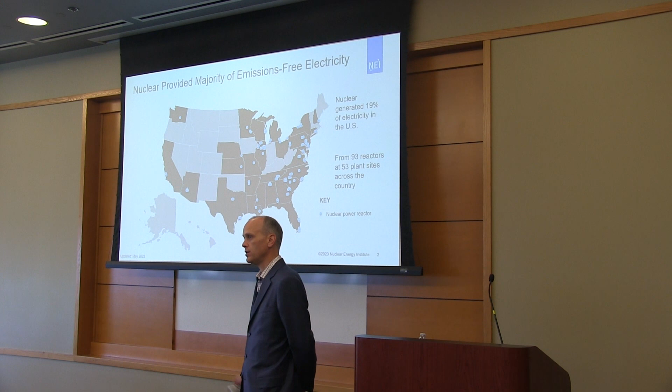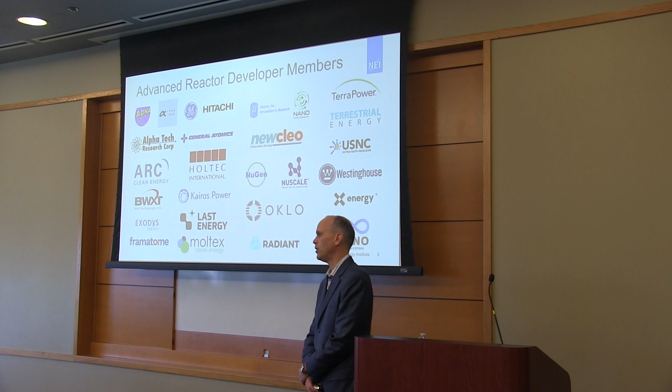The thing that's common with all of these companies is that they see nuclear energy as vital to a clean and sustainable world. A lot of them look at nuclear energy as vital to clean electricity and other energy production, but many also recognize that energy is a foundation of a sustainable living environment, and that there are many parts of the world that don't have access to clean, stable electricity. So some of them are developing designs specifically intended to be brought to other parts of the world.

When we look at the different technologies, there's a couple of ways to look at them, because all of those different companies have different designs. There are some similarities and some differences between all of them. So there are two main ways to group the technologies: one is by size, the other is by the material that's used to cool the reactor.

First, in looking at size, I mentioned today's reactors are 1,000 megawatts in size. We have two types of sizes for advanced reactors. We have small modular reactors—these are 300 megawatts for the reactor size or smaller, and they're modular because you can put multiple together to make bigger units. One example is NuScale, shown here—its reactor is 77 megawatts, and it can come in packs of 4, 6, 8, 10, or 12, so you can customize the amount of power you need for that particular plant. The other size we look at is called microreactors.

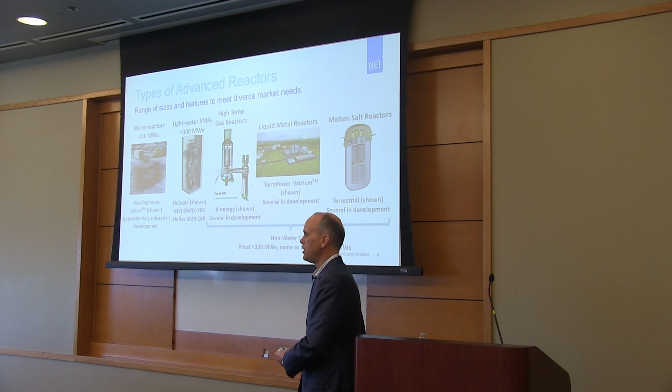The other way to group the different types of technologies is by the material that cools the reactor. So today, the reactors in operation in the United States are all cooled by water. We have water-cooled advanced reactors, NuScale is an example there. And then the others shown here, X-Energy, TerraPower, and Terrestrial, are all cooled by something other than water.

X-Energy is an example of a gas-cooled reactor. That gas is helium. The TerraPower is an example of a liquid metal-cooled reactor. They happen to be using liquid sodium. And then the Terrestrial reactor is cooled by molten salt, and there are many, many different types of those.

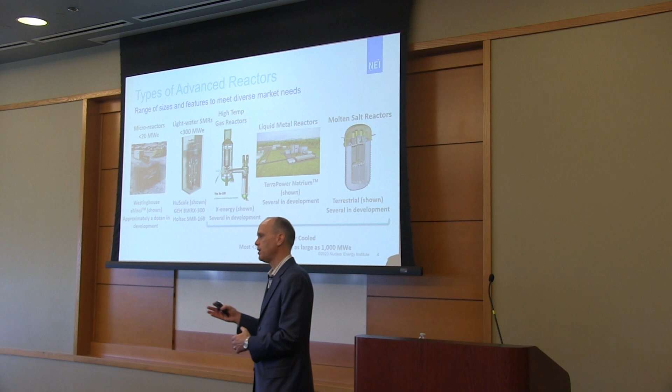Now, within those, there are some technological differences, certainly where it comes into play of engineering and materials and operations. There are differences. But if you zoom out to the macro picture, there's a lot of similarities among all of these advanced reactors, and I'll go into a lot of discussion on that.

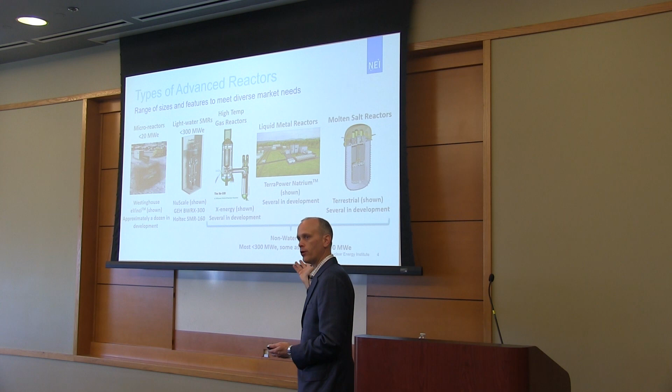The one major difference between water-cooled reactors and reactors not cooled by water is the temperature at which they can operate. The non-water-cooled reactors can operate at much higher temperatures, and this is going to be an advantage when we start to look at non-electrical uses of advanced reactors.

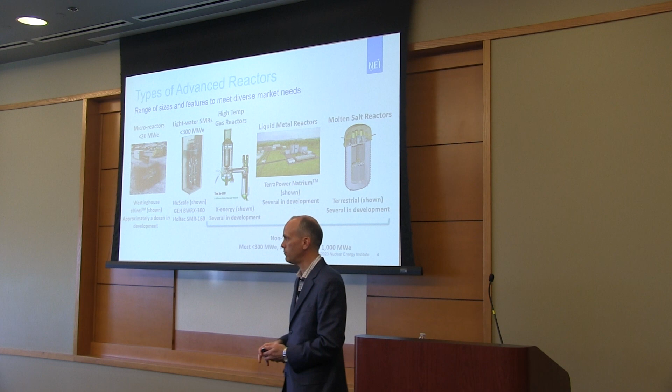So I talked about the current reactors in operation being 1,000 megawatts - it's that one product for the market. And this is developing what we're calling a portfolio of advanced nuclear technologies, really designed to meet a diverse set of market and customer needs. And so what's really, really exciting about the next generation nuclear is that we're bringing nuclear technology into markets and to customers that never could before have access to nuclear energy.

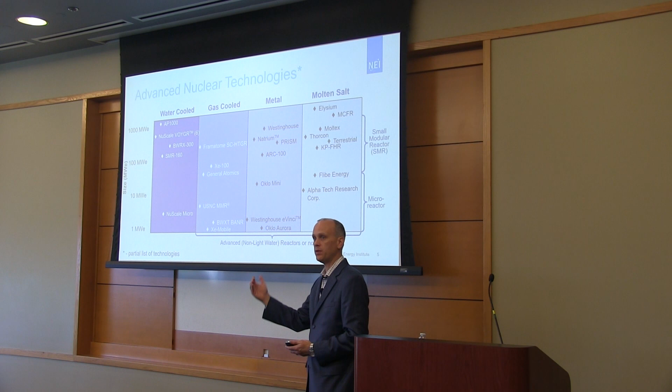1,000 megawatts might be too expensive for some, might have too much power for others. It might not produce the heat at the temperatures that they need. It might not be flexible enough to integrate with renewables or do other things. And so this is really bringing nuclear energy to many more applications and customers.

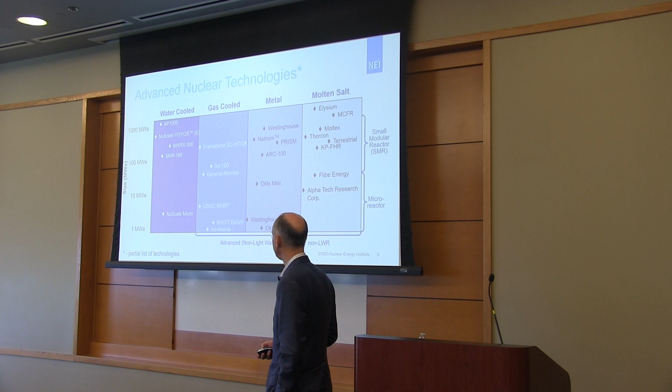And to talk about what those things are, we talked about the size aspect of it. On the energy products, we look at three main energy products. We looked at electricity, which is the traditional product that nuclear energy produces. But there's also heat directly, and there is hydrogen. So a unique thing about nuclear energy is it is the only clean energy source that produces heat that can be used directly. All the others produce electricity, which would have to be converted into heat.

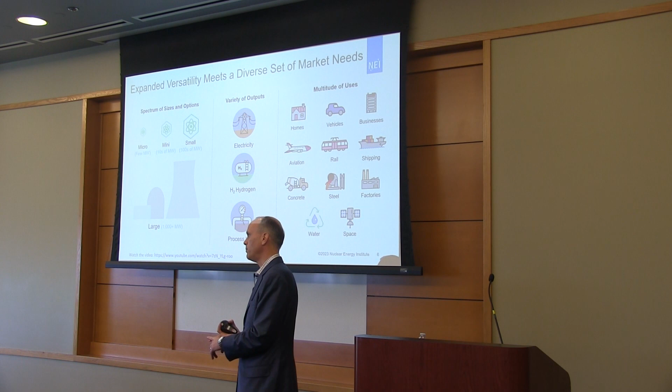And so when it comes to decarbonizing other sectors, this is a real benefit. So if you think about the decarbonization of the entire economy, and especially the energy area, most focus is on electricity. But electricity generation is only about 1/3 of the total carbon emissions from all energy sources. The other 2/3 come from transportation, which some of it we can electrify, but if you electrify, you're going to need more electricity generation, and the other comes from industrial processes, and that's represented by a lot of these uses. So we'll talk a little bit more about many of those industrial processes, but they use heat directly. And so this is something that nuclear energy can help to decarbonize.

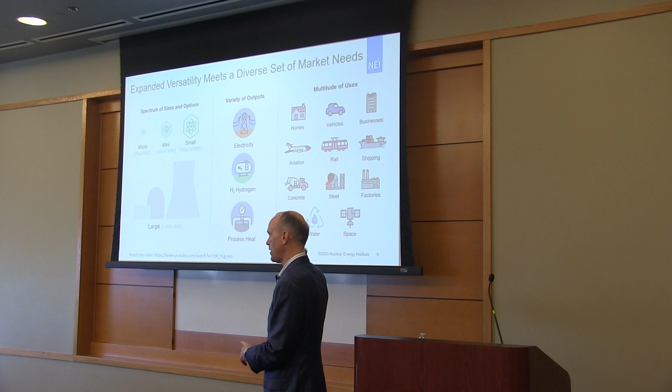Now, there's also a lot of discussion about hydrogen. And hydrogen can be used for generating electricity, used to generate heat, and that heat used in a clean way as long as the hydrogen was produced by a clean energy source. But hydrogen itself has to be produced, and it has to be produced by using energy. And so that's just something to keep in mind.

I want to talk a bit more about the microreactors I mentioned earlier and the markets they can be used in, because this is one of the most innovative technologies among advanced reactors. There are two types of microreactors: stationary or fixed, and mobile or transportable. The stationary ones are intended to stay at their location their entire lifetime—they won't be operated, moved, and operated again elsewhere. That's what mobile microreactors are for. You move them to a location, operate them for as long as needed, turn them off when you don't need them, let them cool, and then transport them to a new location to operate again.

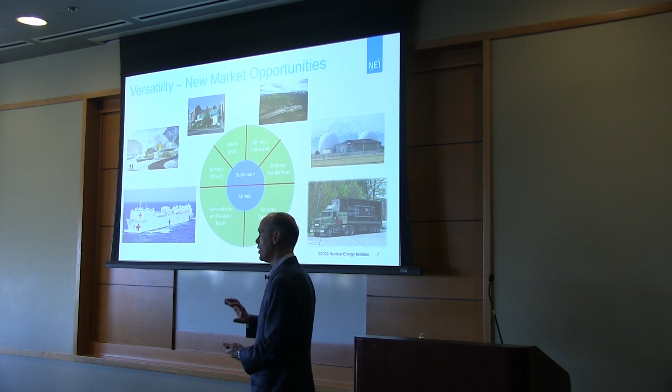There are different market applications for these. The stationary units are well positioned to serve remote markets—Alaska and the Arctic regions of Canada are two areas where most attention has focused for microreactors. The reason is that the cost of power in some Arctic areas is $1 per kilowatt hour, compared to about 6 cents that most of us pay. In Alaska, there's actually a government-supported price subsidy for these very high cost places, which helps reduce costs, but they're still paying maybe 60 cents—a lot more.

For those areas, especially because they need a lot of heat in winter, it can become a question of heating the home or eating. Microreactors are coming in at much lower costs—generally around 30 cents, about a third or half of what's currently produced. A lot of that current cost is in transporting diesel fuel to those areas.

There are other stationary microreactor applications. We can use them for microgrids closer to populated areas—mining is a great example. The Department of Defense is also very interested in stationary microreactors because they need resilience and protection against cyber and other threats.

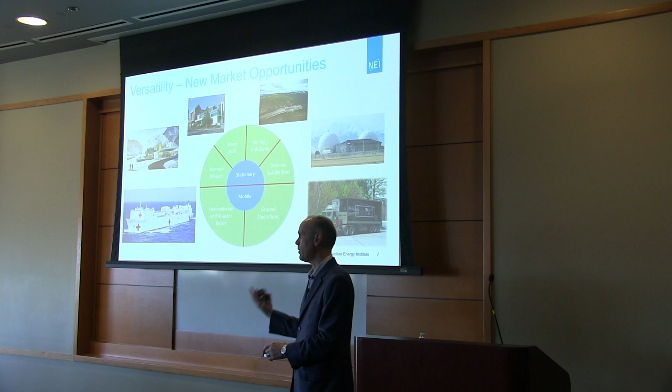On the mobile side, they're interested because they need reliable power deployed for their operations. Another application is humanitarian and disaster relief. In the Pacific, our Navy responds to disaster relief quite frequently, and they need power to quickly restore life and habitability in those areas. There are other disaster relief applications too—I've seen bills in Congress promoting the use of microreactors, even by FEMA, to respond to disasters in the U.S.

Moving on to non-electric uses—industrial heat processes. This chart shows different types of industrial processes by temperature range, and on the left you can see the temperatures that different advanced reactor technologies can achieve. Water-cooled reactors aren't able to reach temperatures as high as other reactor types, but they're still useful for pulp and paper production, desalination, and even hydrogen production at low temperatures.

When you get into higher temperatures, that's when you really start decarbonizing many other sectors. Ammonia is a very important chemical in society, so we can help decarbonize that. You can also do petrochemicals and produce hydrogen. Hydrogen produced at high temperatures is actually much lower cost than producing it only with electrolysis, so this heat-assisted electrolysis will produce hydrogen at a much lower cost.

There are other applications not listed here—this is just a representative list. One of the hardest industrial heat processes to decarbonize is metal refining, because it operates at such high temperatures. People are starting to discuss that the heat coming off advanced reactors, being very dry heat, can be easily boosted to a higher temperature using electric heaters. So there are opportunities to still use nuclear heat directly, even at temperatures above what's shown here.

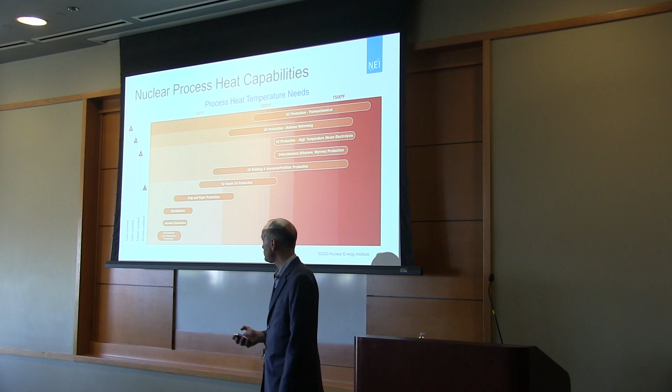Now we're going to focus more on the electricity sector. Looking at what's needed to decarbonize it, we have a chart of many utilities—almost all utilities in the U.S. at this point have made carbon reduction pledges. Each pledge looks a bit different, but most are reaching zero or close to zero carbon emissions by 2050. You can see what that would do to cumulative carbon emissions from electric operations between 2020 and 2050—it's a very significant decrease.

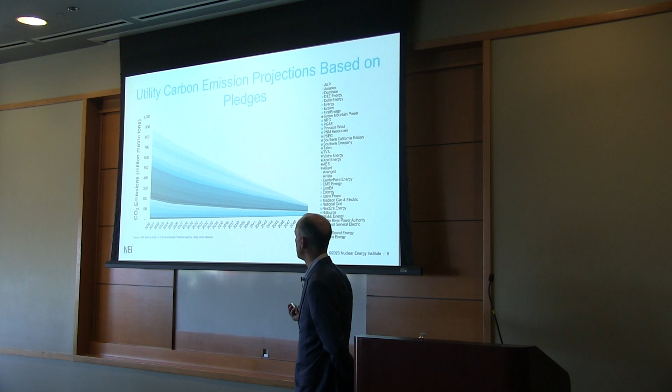But what that means is that they're going to have to replace their carbon emitting generation sources with non-carbon emitting generating sources. So one of the things utilities started to ask themselves is, what is the right generation mix to decarbonize our electric operations? Electricity companies recognized they have a duty to serve, meaning they're required to produce reliable and affordable power. So now they have to have clean, reliable, and affordable, and they started asking, what is the right generation mix from a planning standpoint?

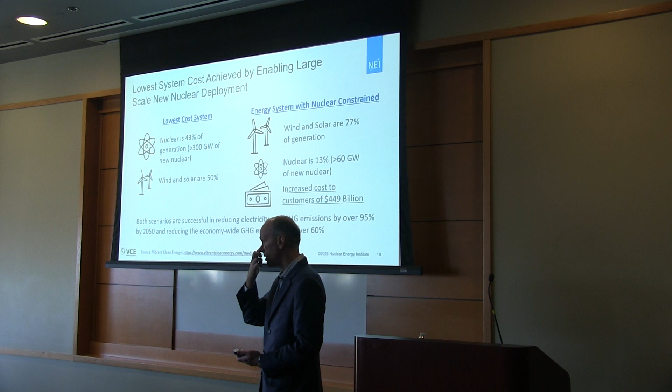There's been many studies out there, and most all of them conclude that we need nuclear, and we need more than we have today.

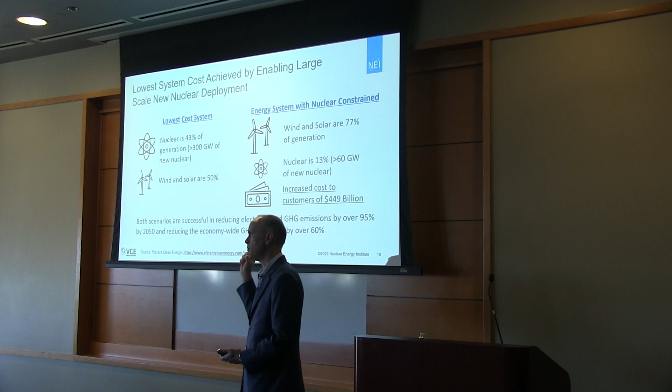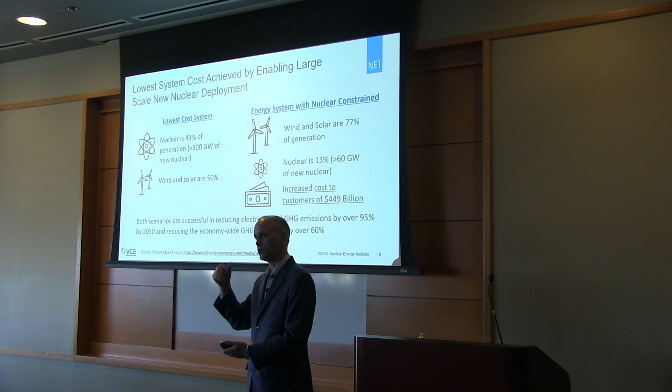This study is my favorite from Vibrant Clean Energy, because it's the only one I know of that actually matches supply of electricity and demand or use of electricity on an hour-by-hour basis and in a geographic basis. They took a 3 kilometer by 3 kilometer grid of the entire United States and modeled where the electricity was being used. As they ran the model, it actually put locations exactly where generation sources needed to be in order to have the most optimal supply and demand balance.

When they ran that model, it concluded that we need a lot more nuclear energy than we have today. We have 20% today; this predicts we need 43%. The amount of electricity we need is increasing over time by 2050, and that represents 300 gigawatts of additional nuclear. We have about 100 gigawatts of nuclear capacity on the grid today, so we need 3 times more than what we currently have.

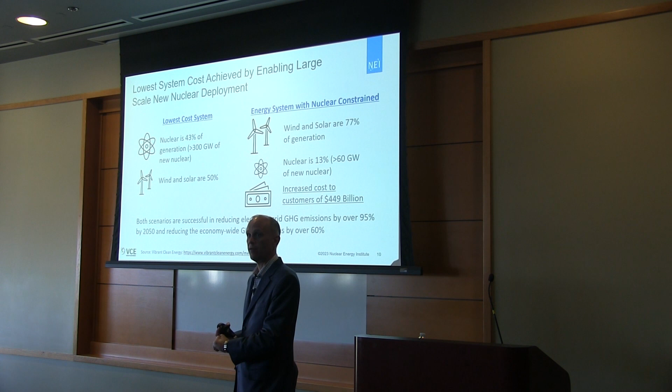The rest would be shared by wind and solar, with some battery storage to complement that. The modelers said that 300 gigawatts of new nuclear is a lot, and maybe we don't have confidence we could build it all, because the regulator may not keep up with the casework, the supply chain may not be responsive, and we may not find all the workers we need. So what if we model an artificial constraint that nuclear can only deploy 60 gigawatts?

They ran the model again with that constraint, and it found other generating sources to fill the gaps, mostly wind and solar with additional battery backup. Between those two scenarios, both achieve a 95% reduction in carbon emissions and both result in acceptable reliability on the grid. The difference was in the cost. A grid without the optimal amount of nuclear was going to cost $500 billion more, and that $500 billion more has to be picked up by people who pay their electric bills.

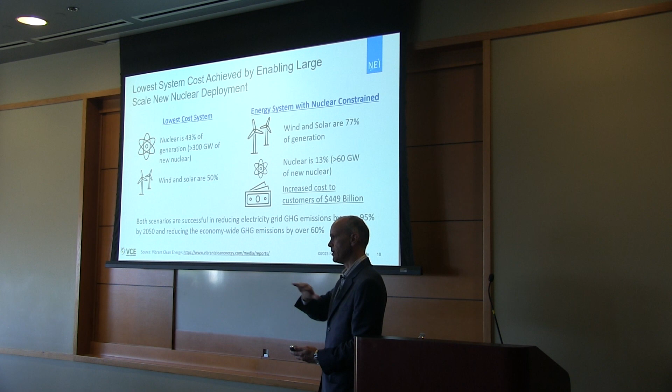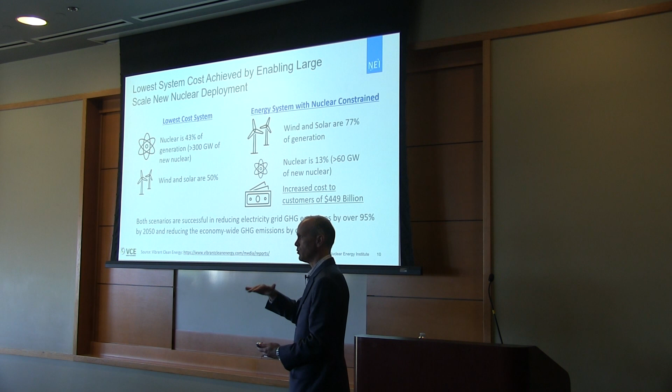One of the reasons I like studies like this isn't because I'm an advocate for nuclear and it says we need a lot of nuclear, but because it actually looks at the question in what I think is the right way, which is what's the total cost of the system, because that's the cost we have to pay in our electric bills. A lot of people look at levelized cost of electricity, which averages all the energy it's going to generate over the cost it's going to incur and says, here's your average cost. By doing that, you miss a lot of the features about matching supply and demand hour by hour, geographically, and other things. So you could come up with the wrong answers if you look at simplified models rather than a more detailed and sophisticated model.

So what are the benefits of nuclear energy? All nuclear energy shares a couple of benefits. One is long-term price stability. We're a very high upfront capital cost technology, but we have very low fuel and operating costs, which means we don't have a lot of fuel cost variability that impacts the cost to customers.

The other thing we have is reliable dispatchable operations, 24 hours a day, 7 days a week, 365 days a year, with very high capacity factors. That means the total amount of energy produced over the maximum theoretical amount of energy produced if it never stops running. The reason it's 92% is that it accounts for refuelings.

So the current reactors refuel every 1.5 to 2 years for about 30 days, and that's what brings it down to 92%. Some advanced reactors are looking at having 10 or 20-year fuel cycles, and so those capacity factors and reliability could be much, much higher.

There's also efficient use of transmission, so a lot of those studies don't actually account for what it's going to take to connect generation to the grid, the cost of transmission, the building of transmission. And so nuclear sources have a benefit in that they're small, compact, a lot of energy in one small location. So the amount of transmission lines you need to connect it to the grid are much, much less. And that shows up in terms of land utilization.

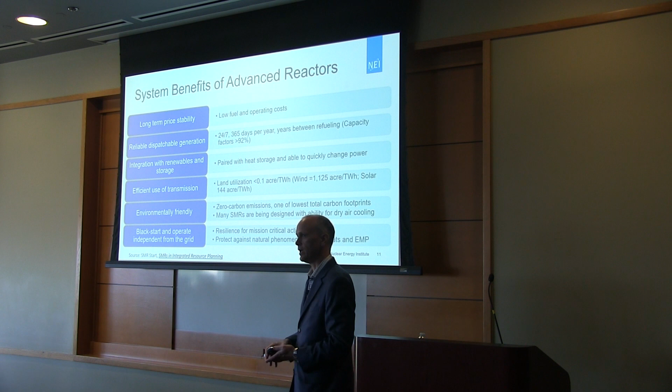And then the other thing is black start capability. That means if the entire grid goes down, the advanced reactors can start up. They don't have to wait for the grid to come back before they can start up. So they can actually be the source that helps the grid start back up. And that's related to independent operation from the grid, in that especially if you have mission critical activities and the grid goes down, these can continue to operate to power your mission critical activities.

The reason that that's possible, I'm going to get into safety features a little bit later, is because today's current reactors, the safety profile requires power from off-site to maintain safety. And these advanced reactors are being designed with safety features that no longer require that off-site power. And so that's why they have this new feature.

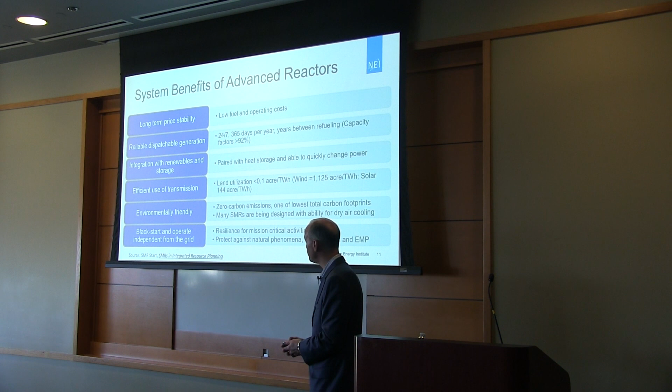Advanced reactors, there's a lot of different definitions for advanced reactors. Now, the best definition is that an advanced reactor has some improvement over the current nuclear reactors in operation today. That improvement could be in economics, it could be in fuel utilization, lower waste yields, it could be enhanced safety, it could be more flexible operations or applications that aren't available today. Could be many of those things.

But one of the things that a lot of them share in common is the economic and cost, some advantages there. So it's a little bit counterintuitive. What the industry went to are ever larger nuclear reactors because you get economies of size.

And so that led us from the first nuclear reactors were not 1,000 megawatts, they were a couple hundred megawatts, and then they grew to 1,000 megawatts. Now today, one of the reasons we're driven to smaller reactors is actually because the market is signaling they don't need 1,000 megawatts or want 1,000 megawatts at a time right now. They want smaller amounts. So that drove us to developing smaller.

But what we found is as you shrank them, the safety characteristics actually started to benefit us. So you have a smaller amount of radioactive material to worry about. That helps on the safety side. You have smaller amounts of what's called decay heat. That's heat that continues even after you've shut down. So that helps on the safety side.

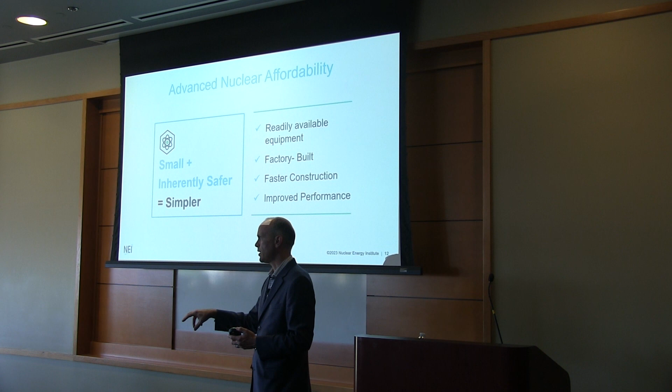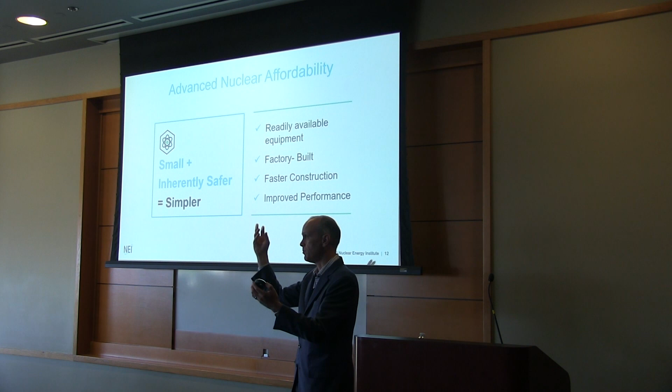The other thing we found is that there's a lot of complexity and cost associated with what's termed stick building it on site. If you think about it like building a house, in the old days, they'd deliver a bunch of lumber, you'd cut it on site, and then you'd try to put it together, and that's stick built. Today, most homes are built with modules, and those modules are basically things that are pre-measured. They're in standard forms because you know you're going to build a lot of the same homes to the same spec. And then you deliver them, and you basically just assemble them, and they go up much faster than they did in the past. So those things help to drive the economics.

When we look at safety, because economics and safety are not opposed to each other, in fact they're complementary. So what is the safety of advanced reactors? Well, today the nuclear industry is one of the safest industries in the entire world. And that's not well known, but it's true. If you look at the number of accidents and deaths and things like that, it's one of the lowest industries in the world. So why is that the case?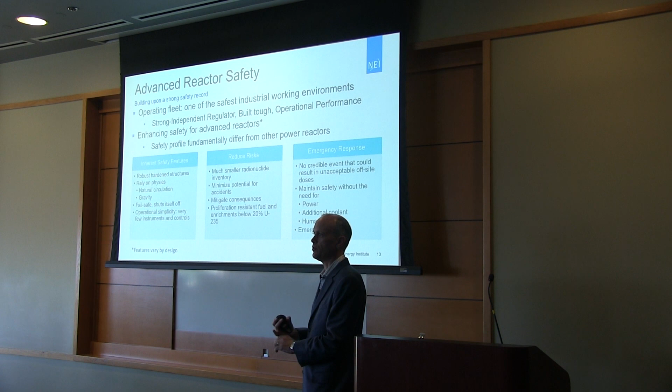Well, there's three pillars, I think, that build upon nuclear safety. The first is that the reactors are built tough. They're built to very high standards. When you think about any particular type of event that might happen, whether it's an earthquake or a tsunami or anything like that, these are built to the highest standards to try and be able to withstand those.

The other is that we have a strong and independent regulator, the Nuclear Regulatory Commission. They're very strict. Many people in the world call them the gold standard of nuclear regulators. And they're very well respected, and so they help to hold the industry to very high standards.

And then the third component is in our operations. So over the years, we have learned to operate with higher levels of performance. And what we find is the better you maintain and operate a nuclear power plant, the more safe it is. And so those three things are sort of our bedrock of safety.

We're adding for advanced reactors to that. So we have a lot of experience about what could go wrong and how it could go wrong at a nuclear power plant. And so we're looking at that in the design space and saying, well, how do we make a design that couldn't go wrong? And so we're designing those accidents out. That's one way we're looking at it.

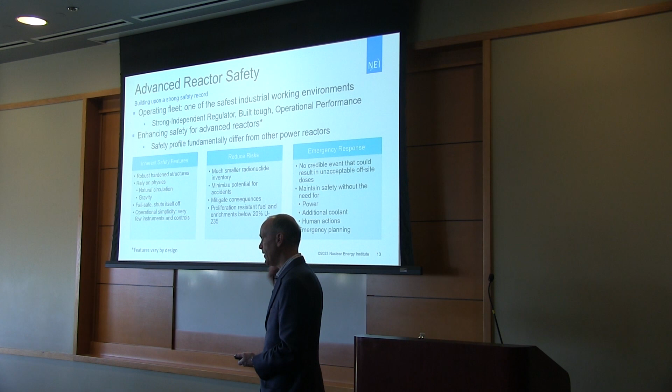I talked earlier about the natural forces, gravity, natural circulation that help to make it safer. And then even within that, if there are even some accidents that are still possible, what we're doing is designing them so that you have much more time to be able to respond. That gives people more time to be able to respond. A lot of reactors are being developed so that you don't need power or human action or additional water to be able to cool these, so that they're basically able to go indefinitely without having to have a concern about a fuel melt.

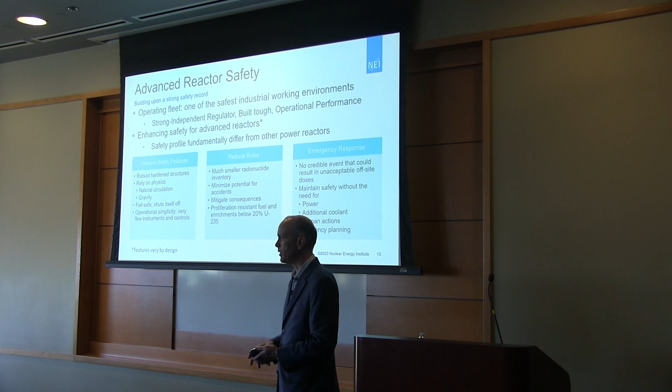So we also get a question about the waste, and we call it used fuel, but other people call it waste. And a lot of people focus on Yucca Mountain and point to it and say, well, the industry doesn't know what to do with the waste. And I think that couldn't be further from the truth. So I think it's important to step back and look at it.

All technologies have a waste stream, and every technology has to do what I think are the same three things to address their waste. First, they have to be able to handle it safely. So what the nuclear industry has done for decades now is manage our nuclear used fuel safely. We can deal with it, we can store it in a pool for a while. Eventually we move it into what are called dry storage canisters. These are steel and concrete that protect the public and people from the used fuel.

We can do that because used fuel is very, very small. If you take all the used fuel in the United States and put it together—about 20% of our electricity over about 40 years—it would fill the size of a football field. It's also a solid. If you looked at a new fuel assembly versus a used one, you couldn't tell the difference visually; one has radioactivity, the other doesn't, so you'd measure it. But it's a solid form, so it's very easy to protect people from waste that's compact and solid, and our Nuclear Regulatory Commission independently verifies that we can store it safely for hundreds of years.

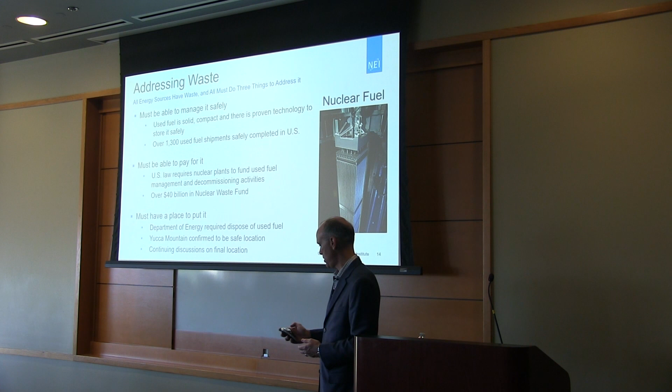The other thing is, the reason we call it used nuclear fuel is that we only use about 5% of the energy from the fuel. The other 95% could be recycled and reused. Today it's just not economically viable to recycle in the United States, but someday it could be, especially as the price of uranium goes up. So preserving that as an option is really, really important.

Going into the technologies, I'm going to run through a quick few of these—looking at the designs of different types of technologies.

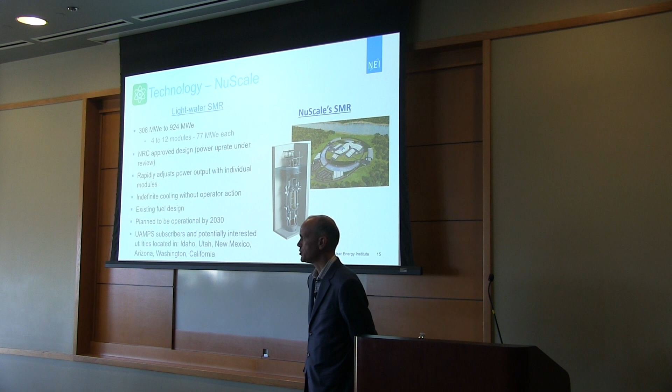The first one's a light water small modular reactor technology: NuScale. NuScale has been working on their design for over 10 years now. They actually have design approval from the Nuclear Regulatory Commission. They're going for what's called a power uprate—their design was approved at 50 megawatts, but they found design enhancements and engineering solutions to improve economics and performance, getting basically the same reactor up to 77 megawatts with just a few key design changes. So they're going to the NRC to get that power uprate approved. They have a project with UAMPS, Utah Associated Municipal Power System, for their first project to be in operation by 2030, located at the Idaho National Laboratory.

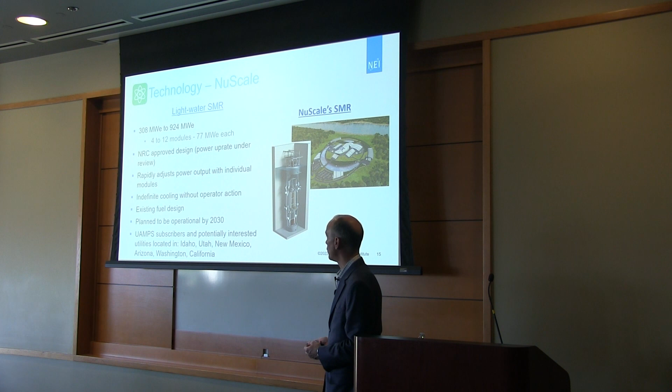The next technology is called TerraPower. They're collaborating with GE Hitachi on their design, called the Natrium. TerraPower actually has multiple designs, and this Natrium is the one they're moving forward with first. The Natrium is a liquid sodium fast reactor, and it has one of those molten salt thermal energy systems with it. They're partnered with PacifiCorp, and their location is in Kemmerer, Wyoming. Their project is to replace a coal generating asset with a nuclear power plant—it won't be exactly on the location where the coal plant was, it'll be a little bit away, since they didn't want to deal with the environmental issues of a coal plant. But they'll be close enough to still use some of the infrastructure, like the transmission and that sort of thing.

Some of these reactors I'm going to talk about, the non-water-cooled ones, use a form of fuel called HALEU. Enriched fuel for water reactors is up to 5% by weight of uranium-235, the isotope used for fissioning. HALEU is enriched to 20% by weight of uranium-235. We don't currently have a commercial supply for HALEU. The only place that can even manufacture it today is Russia, and that's not a source we're going to use. But the Department of Energy is working with a company called Centrus, who has done enrichment in the United States in the past, to run a pilot program demonstrating that it can be done.

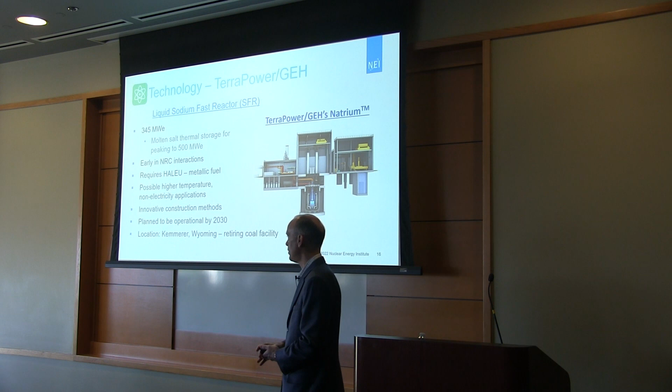There are other companies that could do it in the United States. They need more signals from the industry that form an order book before making that investment, and the Department of Energy is trying to help with all of that.

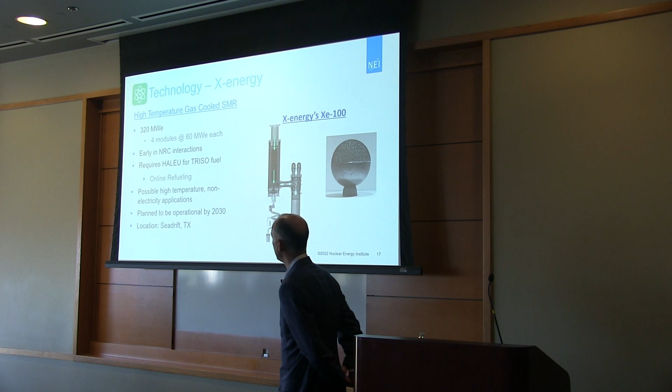X-Energy is a high-temperature gas reactor. They have a project with Dow Chemicals right now, so this is an industrial application. They're going to use heat and electricity to power some of their operations in Texas, and they use a special kind of fuel material called TRISO, which I'll get to in a minute. They also have plans to be operational by 2030.

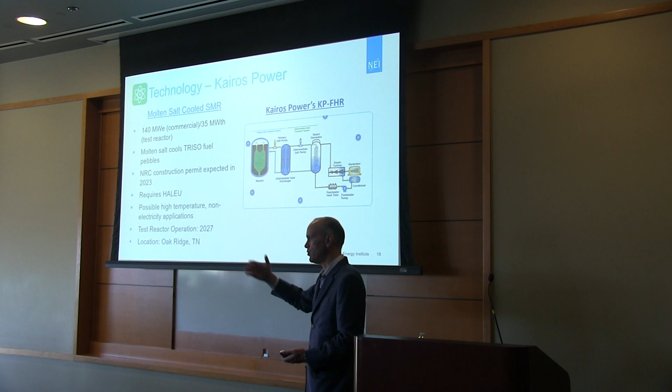Kairos Power is a very interesting design. It combines molten salt coolant with TRISO fuel. They're actually in the process of getting approval for a construction permit from the NRC to build a small-scale test or pilot demonstration of this technology by 2027, and then they have plans for scaling it and being commercial in the 2030s.

This is the key technology, TRISO fuel, that I wanted to mention. Not all advanced reactors use TRISO—some do, mostly high-temperature gas reactors, and Kairos is also using it. The companies that have selected TRISO as their fuel have done so because of its safety characteristics.

TRISO fuel is made of uranium carbide molecules. Most fuel today for water-cooled reactors is uranium dioxide, uranium oxide molecules. The uranium carbide forms very small particles, and those particles are encased in carbon—we call those kernels. Those kernels are then put together and encased in more carbon. What that produces is a very robust fuel form. It can reach very high temperatures, so it's very difficult, almost impossible, to melt. If there were mechanical forces on it, it would tend to break into chunks, so it's much less of a hazard if that were to happen.

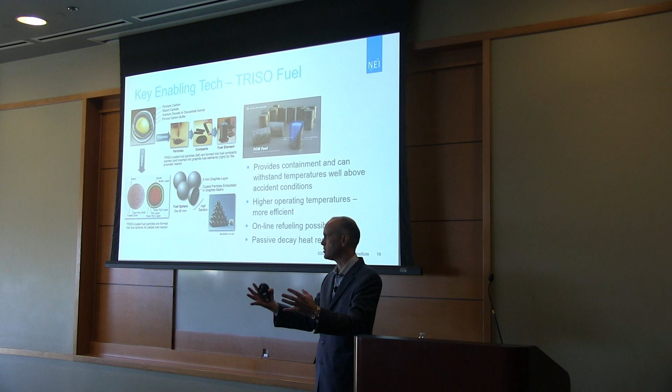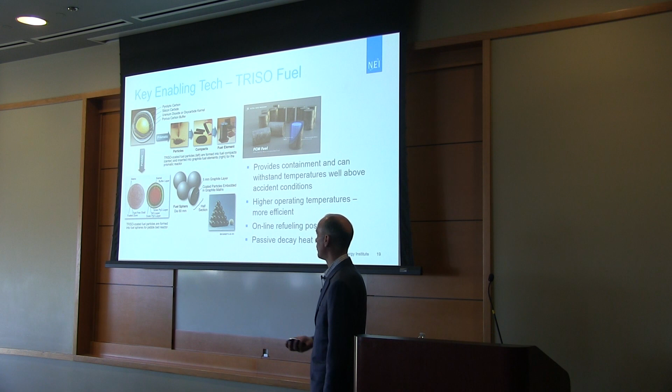One of the unique things they'll be able to do—you're likely familiar that nuclear power plants have what are called containments, so that if there's an accident and the core melts and pressures rise, it's all contained. For TRISO-fueled reactors, the fuel itself will be the containment, because of its safety profile. That'll help improve the economics of the building design and that sort of thing.

Another key enabling technology is called a heat pipe. These are mainly used for microreactors, though not all microreactors use heat pipes. If you're not familiar with a heat pipe, inside it's porous, kind of like a sponge, and it basically sucks heat from one place to another very, very rapidly. If you took a solid metal rod and put it into something hot, it would take a long time before your fingers at the other end got hot. But with a heat pipe, with that porous sponge inside, if you put it in something hot, it would instantaneously burn your fingers.

That's how fast it can transfer heat, and these are really exciting because now you can get away from the traditional ways of cooling reactors and transferring heat, which require fluid flowing—even natural circulation requires fluid flowing. Now this just relies on that much more reliable heat pipe to transfer heat very efficiently.

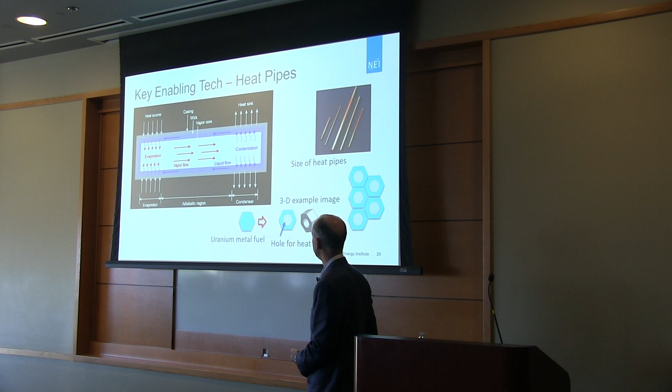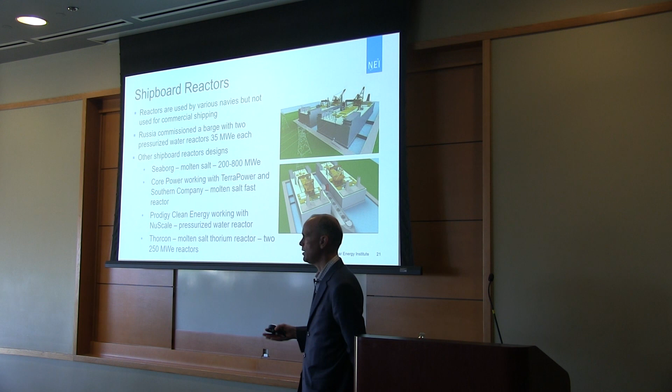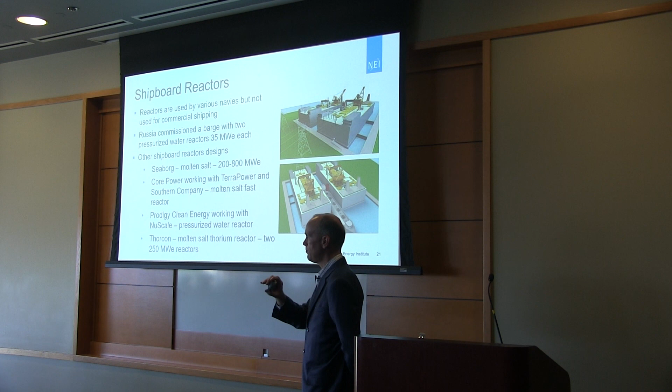One other interesting application starting to be discussed is microreactors on ships. The Russians actually have an SMR, a very large one, on a barge operating somewhere in Russia. But there are other applications people are looking at. The maritime industry has a lot of pressure to decarbonize their operations—right now diesel is about the only way to transport goods across the sea, so they're trying to figure out how to change that. They're very interested in nuclear. There are geopolitical and regulatory issues to work through for a nuclear-powered transport ship to go around the world, but we think the safety and engineering could be worked out, so people are moving forward with that.

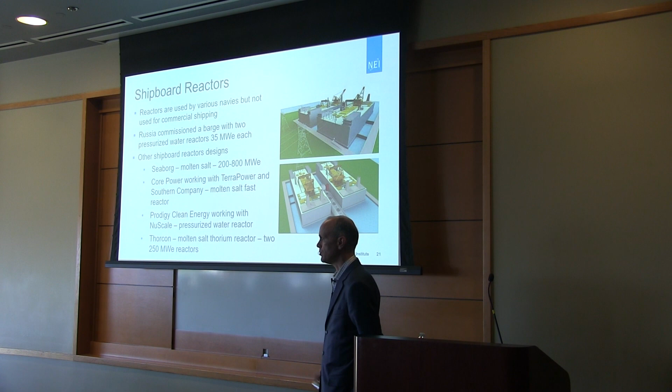Another key enabling technology is advanced manufacturing. The reason advanced manufacturing is exciting is because a lot of nuclear's cost is in the construction. A lot of the cost in construction is related to time, but not just time, it's also man hours. Advanced manufacturing offers the opportunity to reduce both the amount of labor hours that go into production as well as the amount of time that goes into production.

So there are some examples of using advanced manufacturing already in the industry. Just an anecdote of one application that's really exciting. Oak Ridge National Laboratory has a lot of advanced manufacturing going on. I was there for a tour one time.

I looked over and it was a Navy submersible, but it was about the same dimensions as a microreactor vessel. It turns out that Navy submersible usually took tens of months to do and cost a lot of money, but they were able to do it in a matter of a few months and for like 10% of the cost. Looking at that, I thought, well, if we could replicate that for microreactor vessels, we could save a lot of cost and help benefit even more.

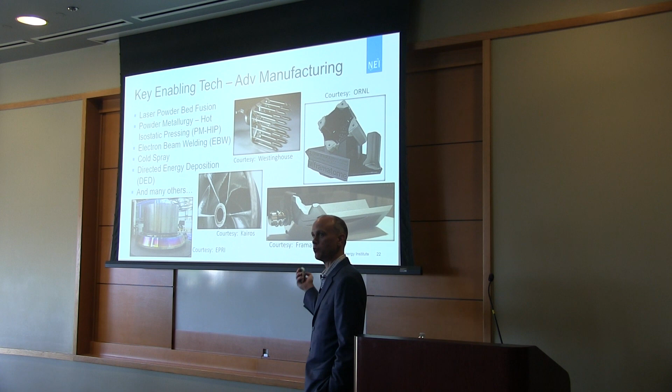So it's just one example, and there are a lot of ways to do it. It's not just 3D printing, there are other ways to do it as well.

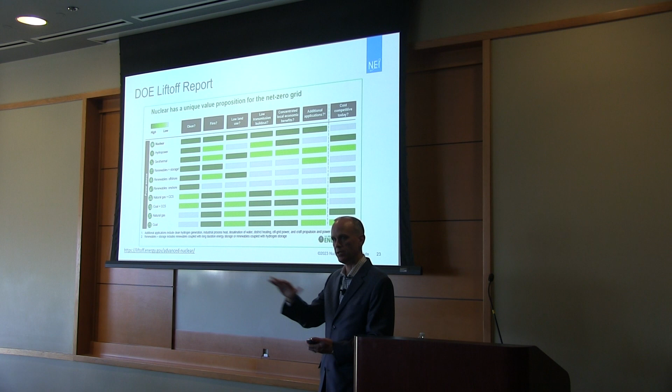I want to talk a little bit about challenges ahead. We talked a lot about the technologies and opportunities, but there are challenges ahead, and so the Department of Energy put together what they call an advanced reactor liftoff report. They actually have liftoff reports for many different types of technologies, and they outline the opportunities, the challenges, and also potential solutions for moving forward.

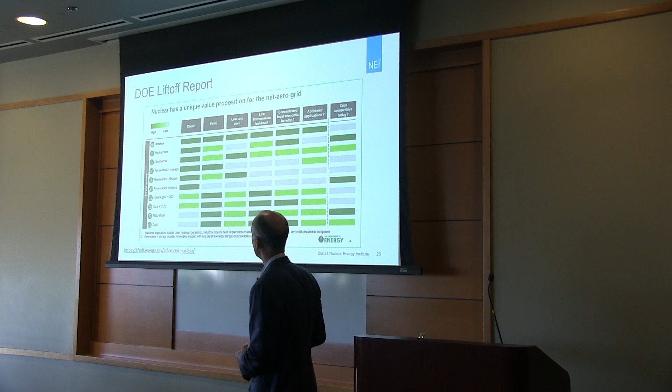This is just one of the many graphs, and it shows a comparison of different technologies and their characteristics. What's important is that the DOE is developing ideas on how to move advanced reactors forward and overcome the challenges of first-of-a-kind technology commercialization. The industry also did the same. We partnered with another industry association called the Electric Power Research Institute. They do more of the R&D on behalf of the industry, where we do more of the advocacy.

We also engaged other stakeholders in the process and developed what's called a roadmap. The roadmap does the same thing: it looks at what the opportunities are, what the challenges are to get advanced reactors into the market, and then what the potential solutions are to overcome those challenges. This is just one graphic from that. These are actually called the key enablers, the things we need to solve in order to move forward. There are two: first movers and fast followers. These are always a challenge for new technologies getting into the market. How do you get the first adopters to come forward and use that technology?

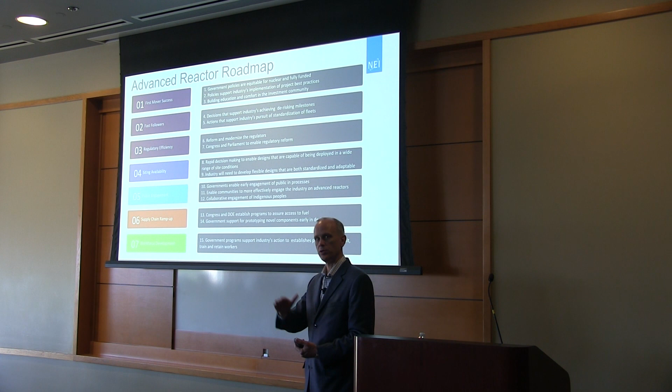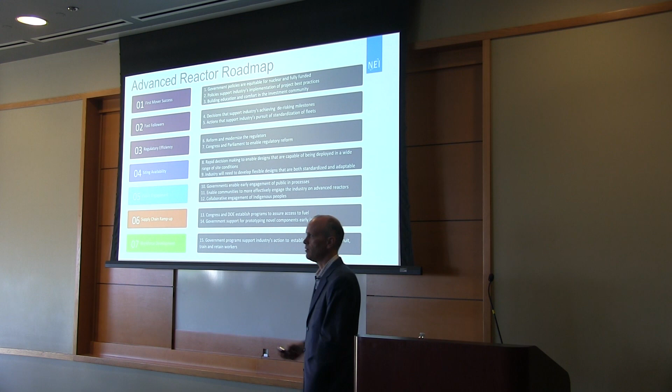Because almost always a first-of-a-kind technology is more expensive and higher risk than the lowest cost alternative in the market. The others, from regulatory efficiency all the way down to workforce, are more scaling issues. As we deploy possibly even gigawatts of new nuclear, how would we be able to scale and do that? This would really be addressing that artificial constraint that the VCE report built into one of their scenarios.

There is a lot of policy support for advanced nuclear. These are just three bills from Congress: the Infrastructure Bill, the Inflation Reduction Act, and the CHIPS Act. Those all have support for advanced nuclear in them more recently. There are a lot of other bills that have been passed in recent years, and a lot of bills in front of Congress right now to support nuclear.

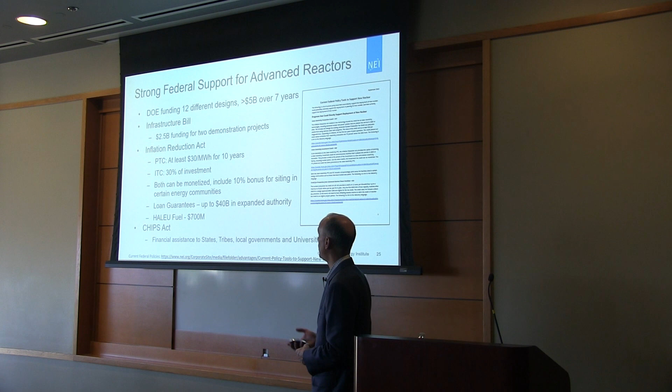Advanced nuclear is one of the only things I know of that has broad bipartisan support in Congress, not just Congress but with the administrations, going back several administrations. Some support nuclear energy because it's zero carbon, others because of national security, others because of economics and jobs, others because it's reliable. But it has enough appeal to both Republicans and Democrats that both largely support it, and most of the nuclear support bills are passed unanimously.

There is also now a lot of state action, and this has really ramped up in the last two years. We're also seeing at the state level a lot of bipartisan support. In the beginning, some states would say, if the opposing party likes nuclear, I must not like it because I'm the opposing party. Then they found out, no, they actually do like it.

There are three main areas where their support is falling. One is removing barriers—some states have moratoriums against building new nuclear. West Virginia is a recent example; they repealed the moratorium, and now there's a lot of talk about bringing new advanced reactors to West Virginia.

Another area is studies and commissions. These would be states that say, well, we hear a lot of good things about advanced reactors, sounds like it could be for us, but we don't know. So let's go study it and find out what advanced reactors mean for our state.

It seems like there's been a big increase in support for nuclear energy in the past. I remember in the past nuclear energy was sort of seen as non-viable due to fictionalization in the media with stuff like Chernobyl and other energy crises. Do you think the rise in government support is mirroring public support and that disinformation is becoming clear, or do you think that's still going to be a big challenge for nuclear adoption?

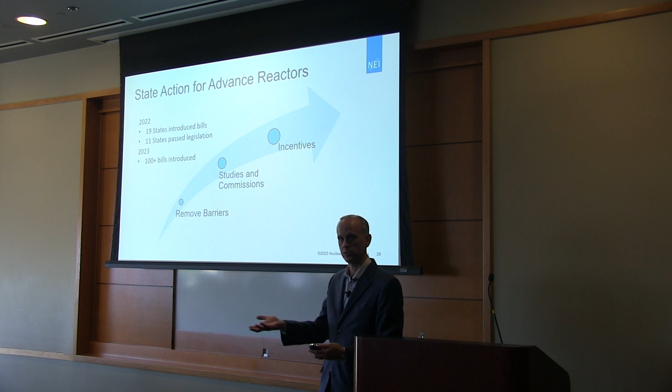So in terms of comparison, whatever people thought about nuclear energy, even if they had concerns over safety and waste, when they look at the challenges of climate change, they recognize that whatever they thought about nuclear is much more agreeable than allowing climate change to continue.

The second is reliability, and a lot of this came after the Texas winter storm, almost two years ago now. It was that outage, the blackouts, and the economic destruction it caused that made people realize we have to not only decarbonize, it has to be reliable. Actually, in some places reliability is even more important to people than decarbonization, and that's really important.

The third is the Russian invasion of Ukraine. When people saw that, they said energy security is really important, and where we get our energy and fuel is really important. Nuclear has always had a good connection to supporting national security and energy security.

For those three reasons, I think support for nuclear has grown. We see a lot of public opinion surveys, and a lot of it agrees that the general public supports nuclear—about 60 to 70% of the population is actually in favor. But when they ask, does your neighbor support nuclear energy, only about 30% think their neighbor supports it. So one of the challenges is perception—we may support nuclear energy but think the other person doesn't, so we avoid the conversation because we don't want conflict. I think there's a lot more conversation now, and those barriers are starting to break down.

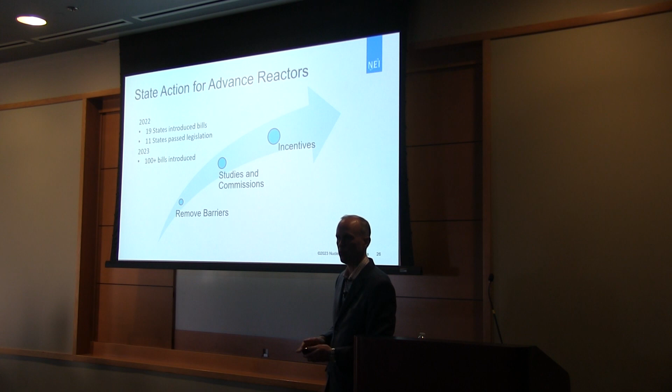The third is that we need to start thinking more about generation not as its own decision, but looking at it as the total system and the total system cost—so generation, transmission, and all of these things that are applicable. I think those three things—it doesn't answer your question, but it gives you a framework to work in.

Yeah, I'm glad you guys are all excited. It seems like we jumped right into questions. I just want to make sure, is this your last slide? I think I have two more, so let me go to that. Let's hold on for further questions.

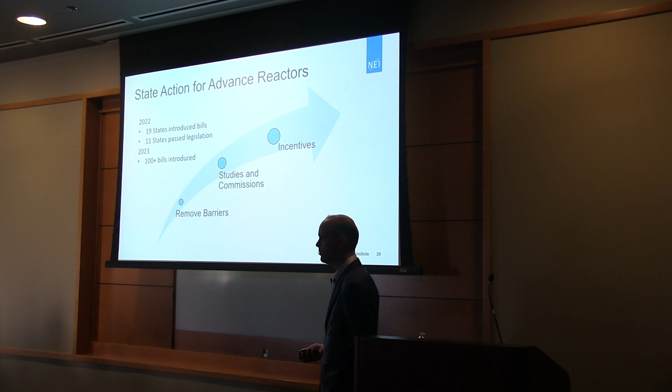So the third bucket is incentives, and there are states that are actually moving forward with incentives. Idaho has a tax incentive. There are other states looking at how to incentivize nuclear energy to come to their state, and maybe not just generation—it could be the supply chain as well.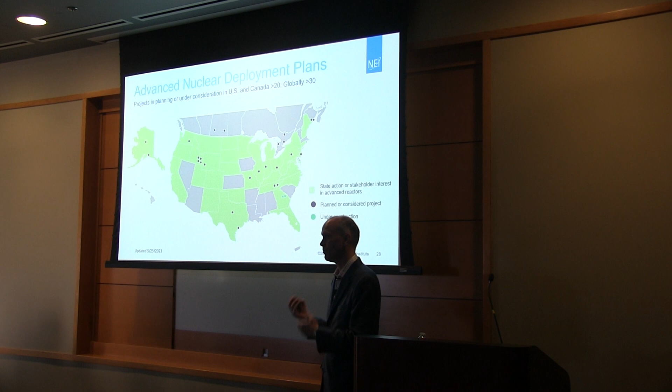There's a couple that are grid-scale applications, like the one in Wyoming. There are actually microreactors to be used at universities—University of Illinois, Penn State, Missouri, Purdue, Abilene Christian University. Many of those universities don't just have electricity needs, they also have heat needs for their activities, and high power needs. So those universities are looking and saying, how can we replace our carbon-emitting sources with clean sources? And they're saying, let's bring a nuclear reactor to our campus. Like University of Illinois, they're going to use it for heat, electricity, and research purposes. When you turn it into a research reactor, things become a lot easier, so they're leading the way in trying to do that sort of thing.

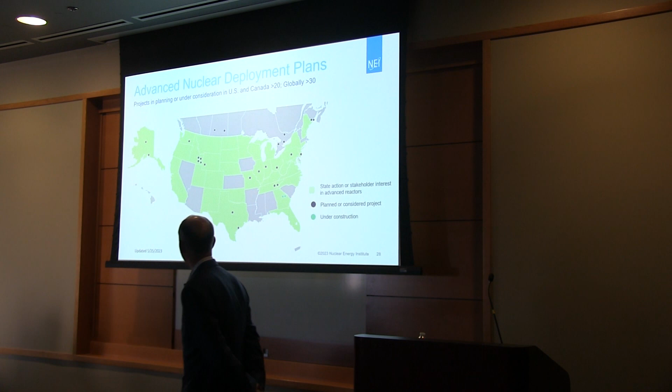What's the problem with Nevada? What's the problem with Nevada? Well... I wouldn't say there's a problem in Nevada, but maybe you know better than I do.

Yeah, this is the last slide, by the way, so we can go into questions.